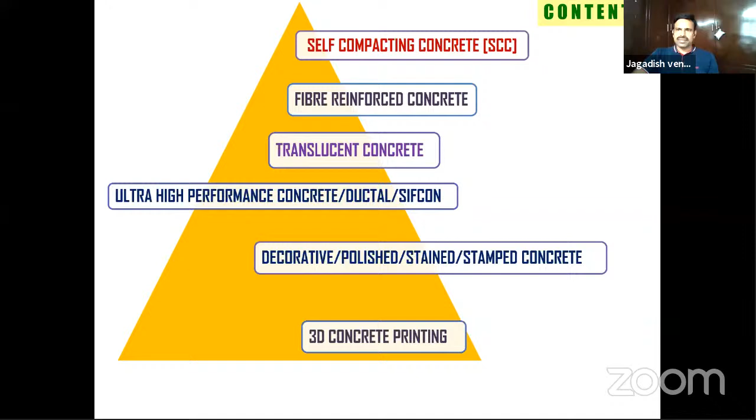To start with, self-compacting concrete. Before that, I would like to show you a video which I took a year back. Most of the time when we go through the concreting happening around us, it is manually produced, site-mixed concrete. I'll show you this video. Please see what is happening.

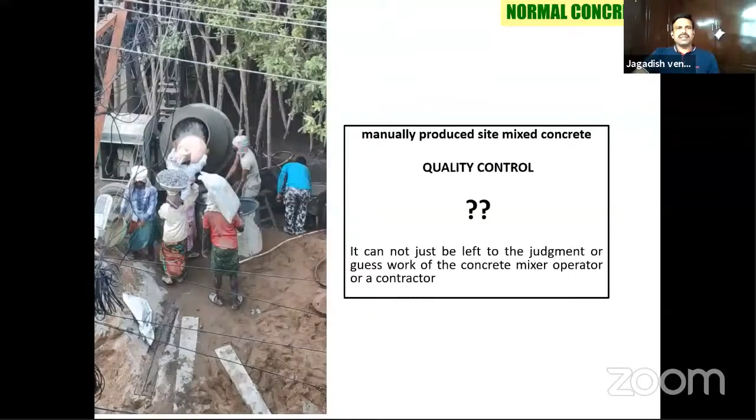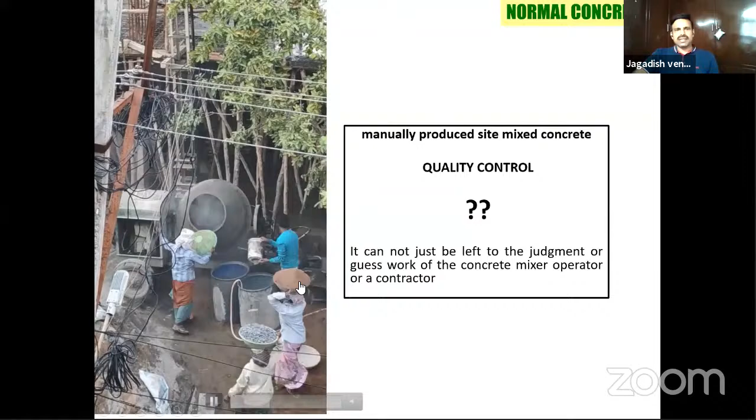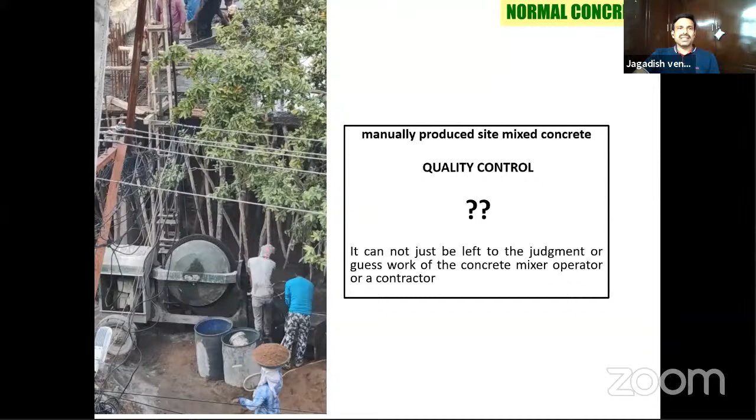The mixer operator is putting in however much water he would like, and people start putting in various quantities like fine aggregate, coarse aggregate, and he has put the cement. If you observe the video carefully, she's putting the coarse aggregate and fine aggregate, while that guy is working at the side doing something else. Just before pouring the concrete, the lady comes, and you see the mixer is moving while he does his work. Now see what happens: the lady has put in the coarse aggregate, and without proper mixing, that fellow is dumping the concrete into the concrete bucket, which then goes up and they place the concrete. So can you imagine the quality of this concrete?

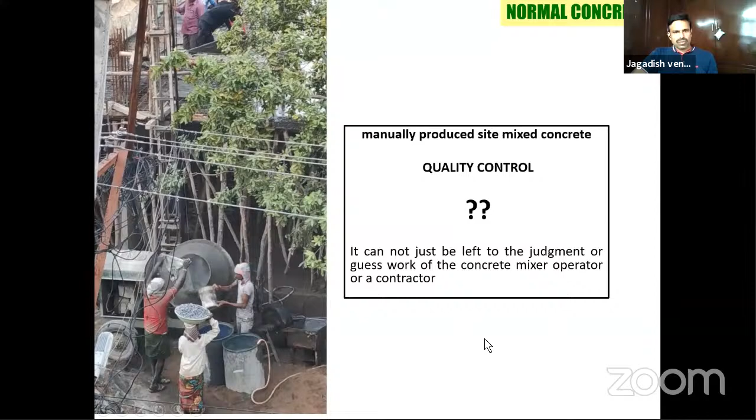You cannot leave it to the judgment or guesswork of the concrete mixer operator or a contractor. This is how many a times at many a places the manually produced site mixed concrete is happening at many sites. So how are you giving quality to this site mixed concrete? This is complicated because a lot of variables are involved in making the concrete, and many properties get affected, both fresh and hardened. You can see the pictures at various places.

But slowly, over a period of time, based on the awareness levels of the customers, people moved either to site batching plants or ready mix plants. So when you have to make the concrete, somebody has to make the concrete.

This is a famous table in IS 456. We design the concrete mix based on the exposure condition, which is very important. There are 5 exposure conditions defined: mild, moderate, severe, very severe, and extreme. The minimum grade of concrete for RCC is M20, and M40 is for extreme. The maximum water cement ratio allowed is 0.55, and the minimum cement content per cubic meter of concrete is around 300 kgs.

So if you have to design the concrete mix, you have to design based on the exposure conditions. Suppose you are in a mild environment, designing two elements like columns and foundations. If the column concrete is in a mild environment, you design for M20 grade of concrete. But the foundation, which is buried under the soil, comes into the moderate condition. So the minimum grade of concrete you have to design is M25, because it comes under moderate condition. So in the same environment, the elements also matter, because the concrete element buried under soil comes under a different exposure condition. You have to go for a minimum grade of concrete that is different.

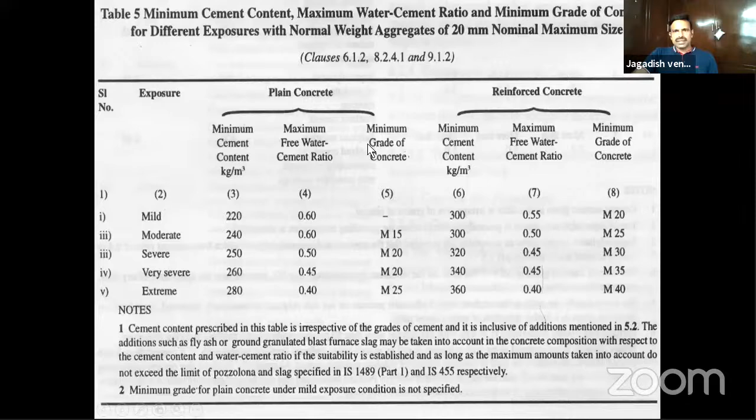With that, let me get into the summary of normal concrete. Typically in cement, we use a quantity between 300 to 400 kgs per cubic meter of concrete. The maximum cement content allowed is 450 kg per cubic meter as per IS 456. Beyond 450 kgs, it leads to heat of hydration, cracking, and other factors get affected.

And the maximum water cement ratio is 0.55; grade of concrete is between M20 to M40, and IS permits you to use mineral admixtures and chemical admixtures. The most commonly used mineral admixtures in India are fly ash, GGBS, and silica fume, and in smaller quantity, rice husk ash, metakaolin, but most sites use fly ash and GGBS in large quantities. For chemical admixtures, they use normal plasticizers to super plasticizers, retarders, accelerators, and so on.

But suppose you wanted to make the concrete flowable, can you make it flowable by merely adding more water? No, because in the fresh state it leads to segregation and bleeding. And in the hardened state, if it segregates and the water bleeds, a lot of air pockets get created in the concrete, and it leads to durability problems.

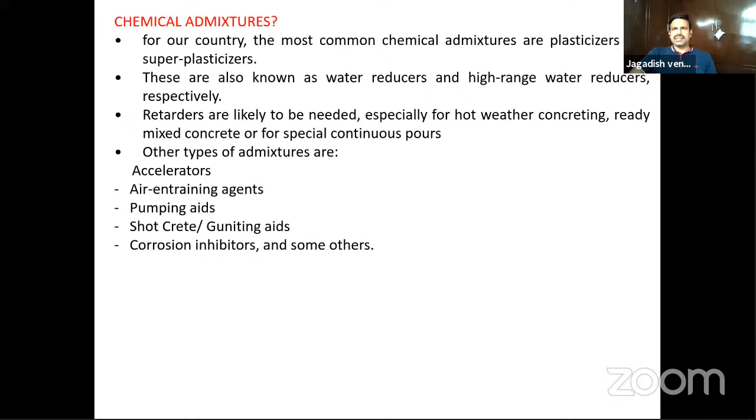So how do you address this issue? How do you increase the flowability? There are chemical admixtures we take advantage of in our country. The most common chemical admixtures we use are plasticizers and super plasticizers. Plasticizers are water reducers, while super plasticizers, as the name suggests, are high range water reducers. We also use retarders and other admixtures such as air entraining agents, pumping aids, shotcrete aids, and other admixtures.

The basic reaction of the chemical admixture, that is the plasticizer: when water is added, the cement naturally flocculates. So the mixed water gets trapped inside these flocks. To release the trapped water within these flocks, we add plasticizer or chemical admixture such that the trapped water gets released and the workability is increased without adding more water.

Suppose if you look into the example here, when you add this chemical admixture, the cement gets deflocculated and the entrapped water is released, and the cement particles move freely. More water is available for the fresh property, the workability increases, and even hydration improves. There are different mechanisms we talk about depending upon the chemical admixture.

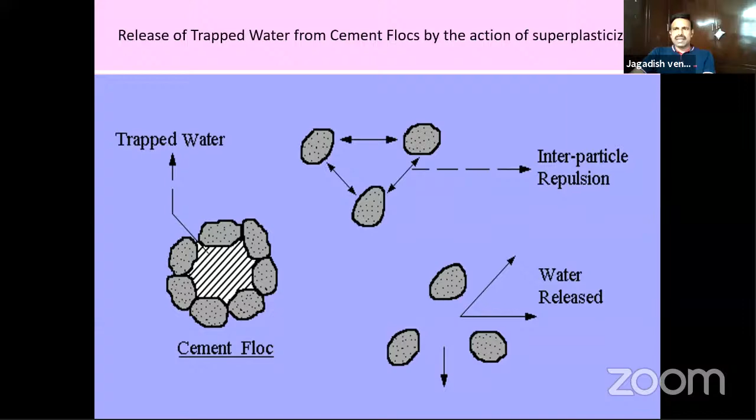By adding the chemical admixture or plasticizer, you can do two things. One is you can increase the slump without changing the water cement ratio. In the first case, you have 0.55 as the water cement ratio, 75 mm slump, and 51 MPa strength. Without changing the water cement ratio, by adding the chemical admixture, the slump increased from 75 to 180 mm.

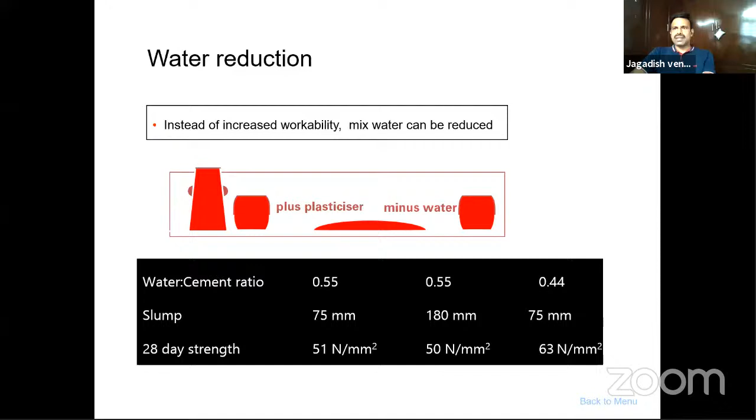In the second case, we have maintained the same slump. By adding chemical admixture, you have reduced the water cement ratio such that for the reduced water cement ratio, you got more strength, that is 63 MPa from 51 MPa. So by changing or maintaining the water cement ratio, either you can get the slump or you can get the strength.

When you're placing concrete in reinforcement, usually we call it the free fall height of concrete. As per IS, it should be 1.5 meters. Suppose if you are placing normal concrete, what happens? The mortar gets stuck to the reinforcement, and the other particles like sand and particularly the coarse aggregate particles get separated out. Only the mortar gets stuck to the steel, particularly in congested reinforcement. This is the common segregation we observe in many of the sites.

So you need a flowable concrete to place it in congested reinforcement. At the same time, it has to flow. So how do you achieve flowable concrete without segregation or bleeding? By adding more fines.

So you cannot use more cement, you cannot go beyond 450 kg of cement, because you need more powder to flow the mix. So by incorporating fines, you can impart cohesion in the mix and enhance the ball bearing effect, that means the workability of the concrete.

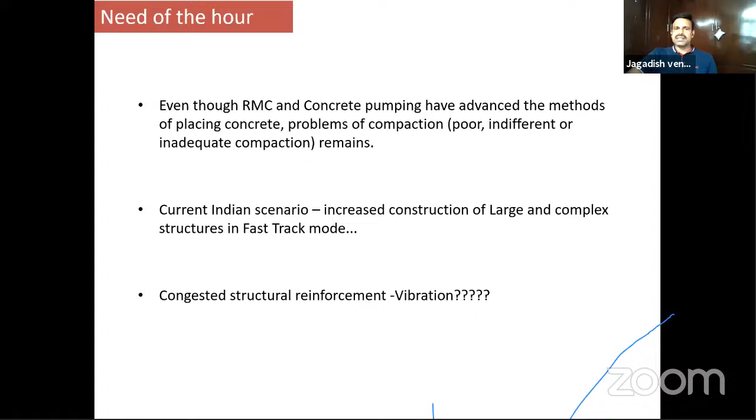RMC and concrete pumping are the advanced methods. But we have large and complex structures coming up in India, and people are using it. There is a lot of congested structural reinforcement. Vibration is a question mark in many of the sites. These are the kinds of congested structural reinforcement you can see, particularly for special structures.

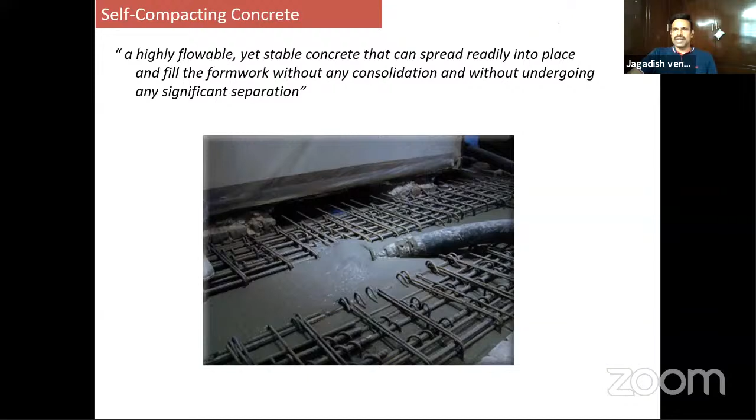So what is the solution? What kind of concrete do you have to put in? You have to place concrete which is highly flowable, and it should be stable all the time, and it should readily place and fill into the entire formwork without any vibration, without any consolidation, and also at the same time it should not get separated. That concrete is nothing but self-compacting concrete.

So where did it originate? There was a skilled workers problem in the Japanese industry in the late 1980s, 1990s and so on. So the motivation behind SCC's origin is the gradual reduction in skilled workers in the Japanese construction industry. The work was started at University of Tokyo by Okamura and others.

There are a lot of advantages, particularly of self-compacting concrete. It will shorten the concreting period. It will minimize the voids. No need to vibrate. It will avoid honeycombing. It will eliminate compaction using the vibrator and so on.

How are the properties different from normal concrete? In normal concrete, the powder content is between 300 to 450 kg per cubic meter. But in case of SCC, the powder content varies between 450 kg per cubic meter to 600 kg per cubic meter. So the minimum itself is 450, up to 600 kg, is the powder content.

In normal concrete, if you take generally a normal mix of M20 grade, the fine aggregate varies between 700 to 800 kg per cubic meter, and coarse aggregate varies between 1200 to 1400 kg per cubic meter. But in case of SCC, there is a lower coarse to fine aggregate ratio. That means both coarse and fine aggregate are in equal quantities, or sometimes the coarse aggregate is in lower quantity compared with the fine aggregate.

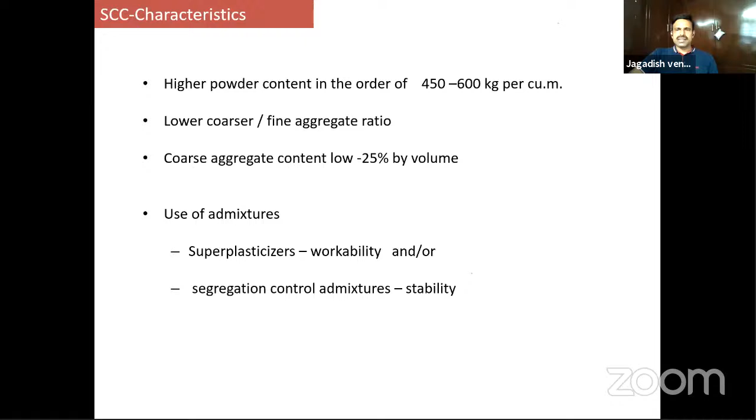So you have to look for other materials. This powder content will keep the coarse aggregates in suspension during the flow, and it will also give a lot of cohesiveness to the concrete. Beyond 450 kg, you have to use powder content in SCC, so you have to look for other powders.

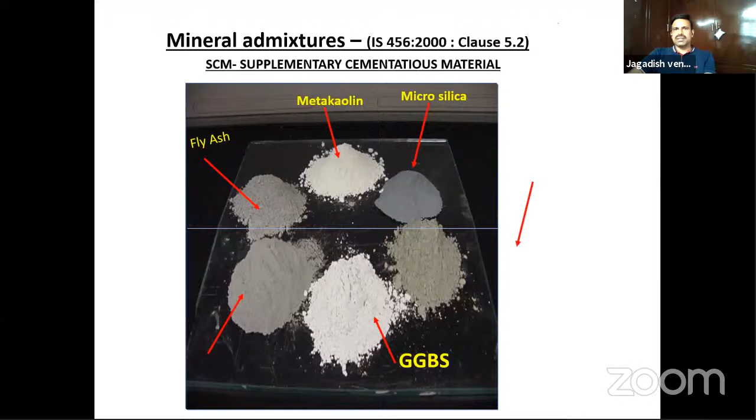As IS 456 clause 5.2 allows you to use a number of mineral admixtures, as I mentioned, starting from fly ash, GGBS, Alccofine, microsilica, metakaolin, rice husk ash, and so on.

What if you add a mineral admixture? You know the basic reaction. When you add water to cement, the basic hydration process happens. The final product, what we call calcium silicate hydrate, that is CSH gel, gives strength to the concrete. And there is a remaining amount of calcium hydroxide, or Portlandite, as we call it.

Suppose you add a supplementary cementitious material, the excess lime present in the concrete will react with the supplementary cementitious material, whether you add fly ash or GGBS. This secondary reaction will happen and form more CSH gels in the concrete. The excess lime present will get reacted again with the supplementary cementitious material, forming more CSH gels, meaning a denser concrete and more strength.

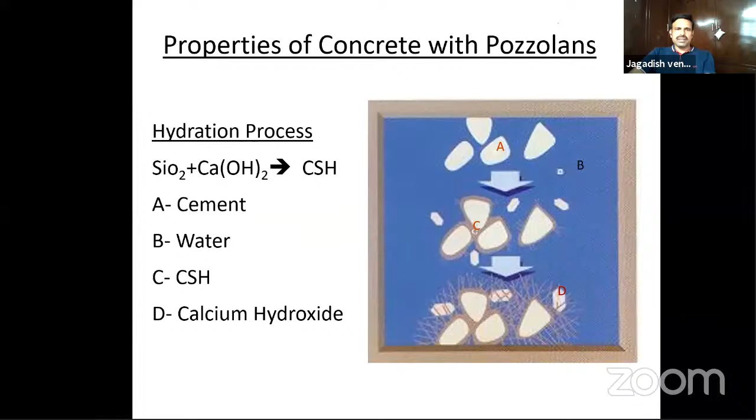This is the typical hydration process. If you add pozzolan, it will increase the impermeability and increase the strength because the pores get filled with additional CSH gels. It will also increase the compression and tensile strength because you have fewer bleed pockets and a denser hydrated cement paste in the concrete with pozzolans.

So we call fly ash the ideal material because India generates more than 100 million tons of fly ash annually. We have many thermal power stations, a number of thermal power stations. Right now I'm in Vijayawada, and we have the Vijayawada thermal power station, the Raichur thermal power station in Karnataka, and Mettur. There are a lot of thermal power stations all over India generating electricity, since the major generation of electricity is from thermal power plants.

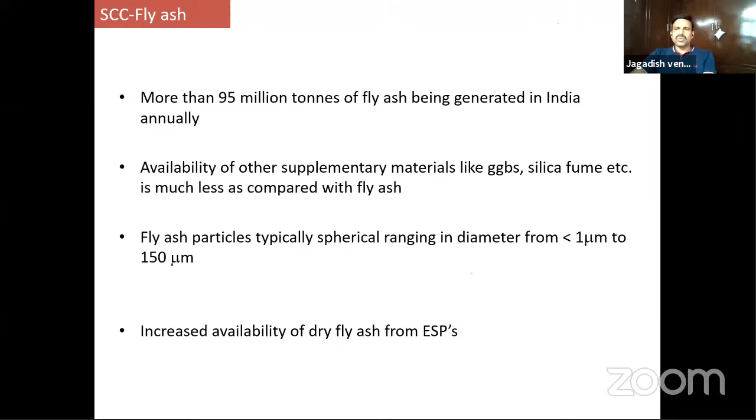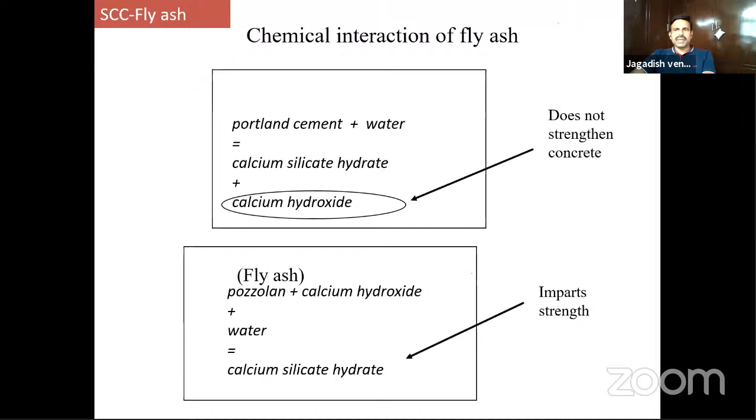This I have already explained. When you add any supplementary cementitious material, a secondary reaction happens, and that's how you get more CSH gels, which imparts strength to the concrete.

When you compare fly ash with other materials like silica fume or metakaolin, it is low cost. You need to spend cost on transportation, and you can use it in larger quantity, like 150 to 350 kg per cubic meter. That's why we call fly ash the ideal powder.

Coming to the properties of self-compacting concrete, for normal concrete you generally only do the slump test and other tests at sites, but for SCC you need to test three properties: filling ability, stability, and passing ability.

Filling ability is the ability of the concrete to flow and fill completely all spaces under its own weight.

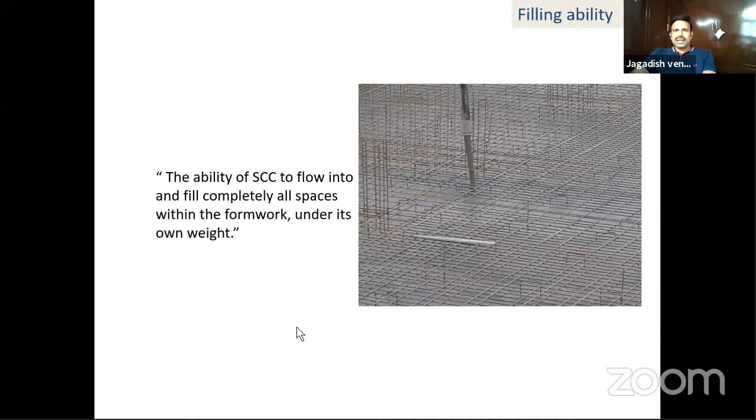Passing ability means the SCC, once poured onto the element within the formwork, has to flow through the reinforcement, through the tight openings of the reinforcement. While flowing, there should not be any segregation or blocking of aggregate. That's how the passing ability test has to pass.

I'll show you what kind of test you do on SCC. Next is segregation resistance. It should remain homogeneous throughout. After mixing, while transporting, and while placing, it should be homogeneous in composition. Very important.

Some of the test methods we use are slump flow, with T50 centimeter slump flow, which measures filling ability. Similarly, J-ring, V-funnel - for V-funnel you do two tests, one at 0 minutes and one at 5 minutes. We also do L-box test, U-box test, fill box test - these measure passing ability. And there's a GTM screen stability test and Orimet test.

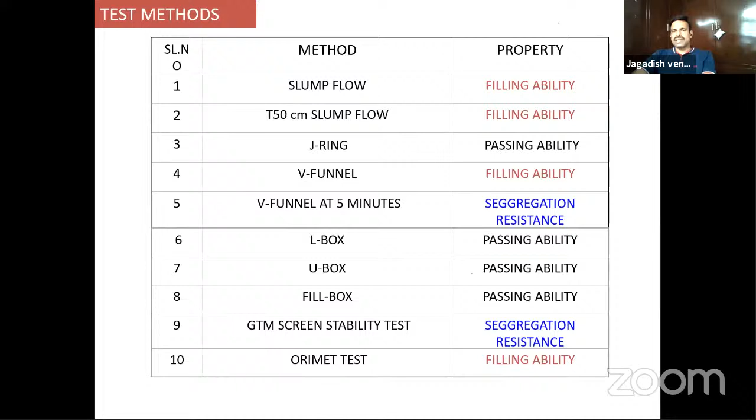Okay, some of the tests I'll show you now. You know the slump cone - this is the slump test I'm going to explain. Normally for normal concrete, you place the concrete in 3 layers, tamping each layer 25 times, then lift the slump cone and measure the vertical slump.

But in case of self-compacting concrete, because it flows, you have to measure the horizontal spread. So once you lift the slump cone, it spreads, and you measure the horizontal free flow. The range of the spread should be between 600 to 800 mm. So once you lift, the concrete flows - this is how you measure it.

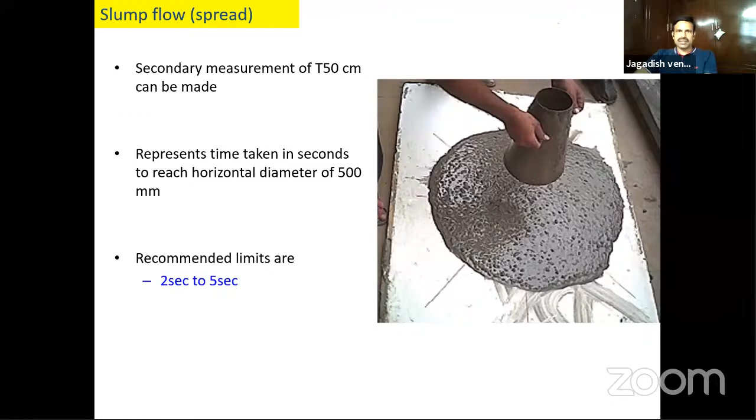There is also one more measurement we do for self-compacting concrete - the time taken for the concrete to reach a diameter of 500 mm. Once you lift the cone, since the bottom is 200 mm, top is 100 mm, and height is 300 mm, the 200 mm base spreads. So the time taken to reach from 200 mm to 500 mm is measured - we call it the T50 centimeter time. It should be between 2 to 5 seconds.

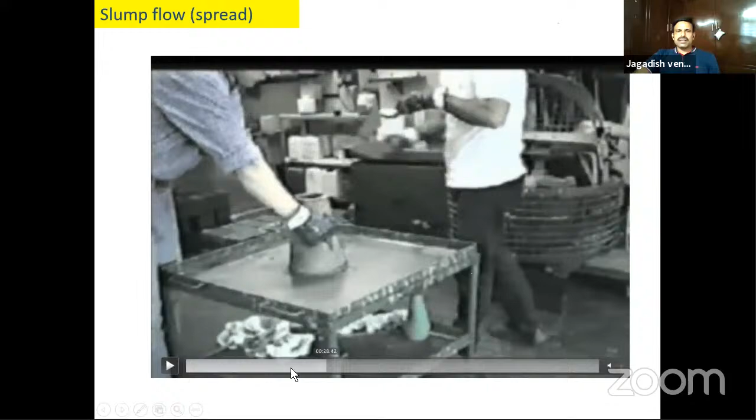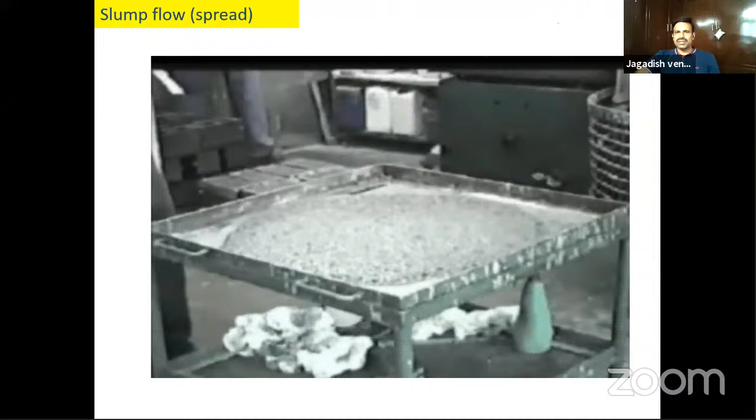So you should not place the concrete and tamp it like normal concrete. You just have to pour the concrete once you mix it, and after pouring, you just lift the slump cone. This is how it spreads. You can measure the T50 centimeter slump flow and the total horizontal spread the concrete has taken. You can also observe whether there is any segregation or bleeding in the mix. This is how you measure the slump flow.

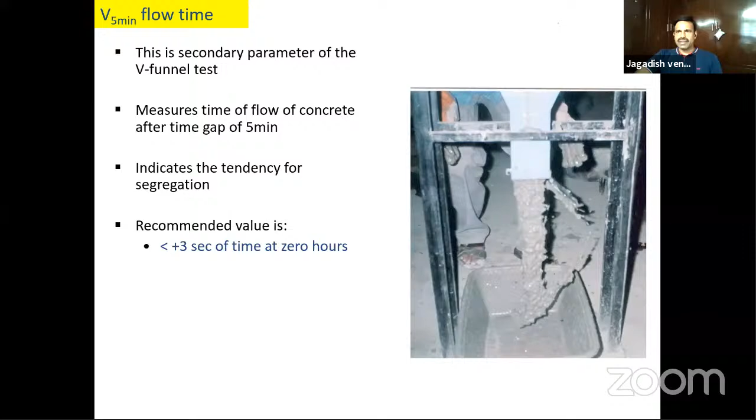There is one more measurement you do using the V-funnel, that is the V5 minutes flow time. You place the concrete in the V-funnel and wait for 5 minutes, then open the bottom door and measure. What happens when you place the concrete and wait for 5 minutes? If the mix is not good, all the coarse aggregate gets collected or settled at the narrow end. So when you open the gate, it will slowly pass through the narrow end because the concrete is not good. The recommended value says it should be less than V-funnel time plus 3 seconds. That means if V-funnel time is 8 seconds, V5 minutes flow time should be less than 11 seconds.

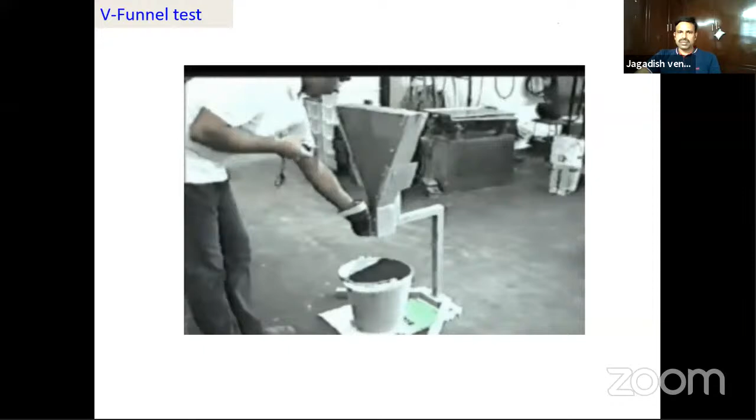This is how you can see in the video - you just pour the SCC onto the V-funnel and get ready with your stopwatch. Then you remove the bottom door, pull it open, and measure the V-funnel time. Similarly, you wait 5 minutes and measure the V5 minutes flow time as well.

Next test is the L-box test. In the L-box test, you have two boxes - one vertical and one horizontal. Here you measure the passing ability of fresh concrete. There is a small gate consisting of reinforcement, and the concrete should pass through this reinforcement.

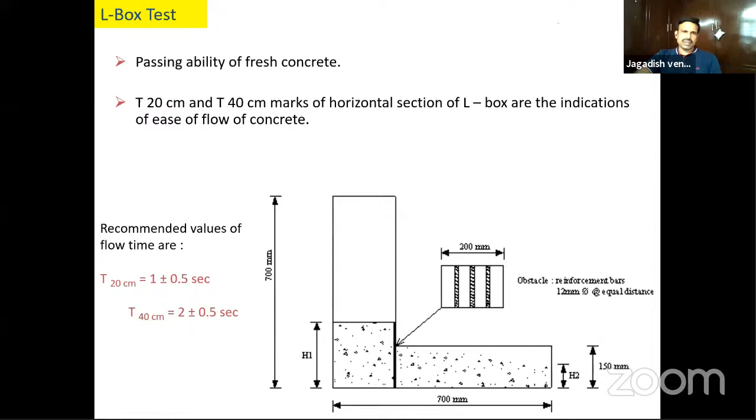So here you measure two things: the time taken to reach 200 mm and 400 mm horizontal box dimension. Our total horizontal box dimension is around 700 mm. You measure from the vertical box the time taken to reach 200 and 400. The recommended value is also there. But what you measure is the blocking ratio of the concrete.

Once you fill the concrete in the vertical box, you lift the gate. The concrete has to flow through this reinforcement, and you measure the heights at both ends. The ratio between both heights gives you the blocking ratio. It should be greater than or equal to 0.8. If it is less than 0.8, there is a problem with the mix.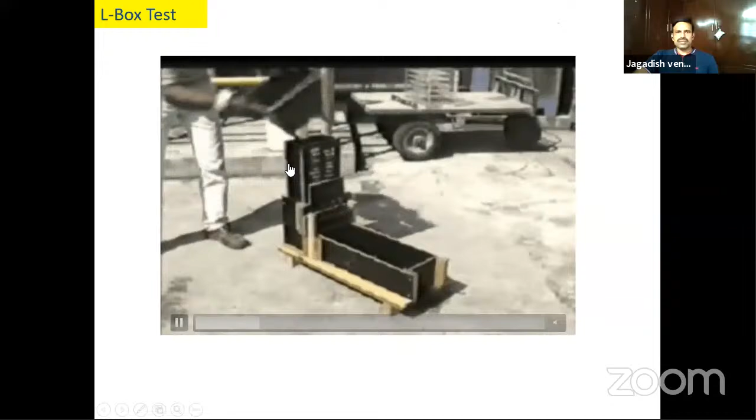So this is how you measure the L-box, the small video. Once it is filled, you lift the gate and there is reinforcement, so it passes through the reinforcement. You measure both ends, what is the height, and the ratio between both heights gives you the blocking ratio, that is H2 by H1.

There is also a measurement called the U-box test. This also measures the passing ability, just like L-box. You fill one limb of the U-box with the SCC, then you open the gate and it will pass through the reinforcement placed at the middle, and the concrete comes into the other limb. You measure the height difference in the two limbs. It should be less than 30 mm.

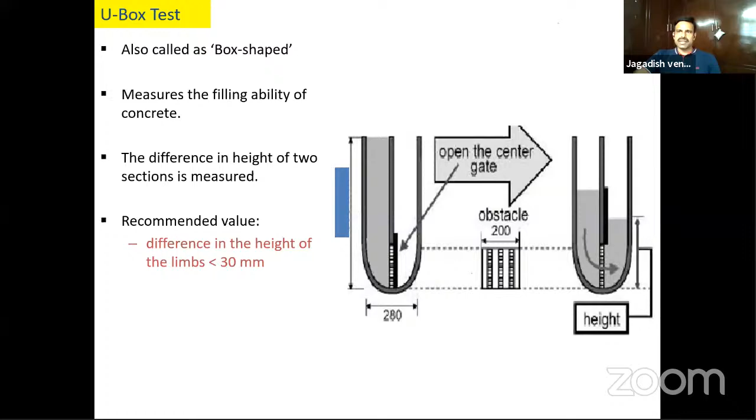This is how you measure. One of the limbs you are filling using SCC. While filling, the gate is closed - there is an obstruction between one limb and the other. Once you pour the SCC, you lift the middle gate, and you can see the concrete flow through the reinforcement and come to the other limb. Then you measure the height difference between these two limbs. You can see here, this is here and here. The height difference should be less than 30 mm.

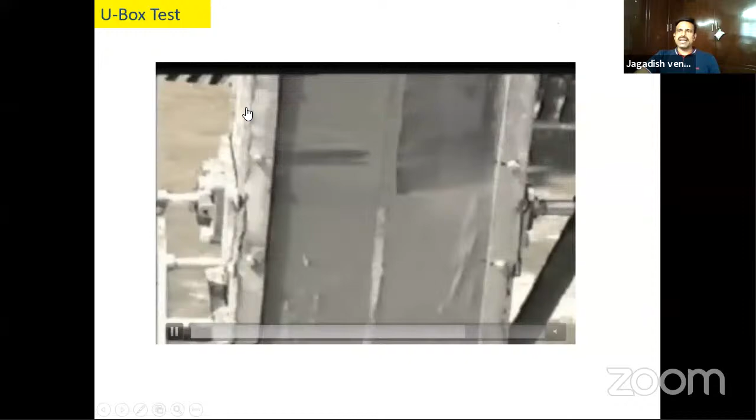That's how you measure. Next, there is also a test called the J-ring test. This is a simple test. You measure the filling ability and a little bit of passing ability. You have a ring with reinforcement. At the middle, you place the slump cone. You pour the concrete, you lift the slump cone, and the concrete also passes through this J-ring. You measure the height difference between inside the J-ring and outside the J-ring, because it passes through the reinforcement.

If the mix has a problem, you will find more height in the middle because it won't pass through. So the height difference between inside and outside of the J-ring should be less than 10 mm. This is how we measure the J-ring test.

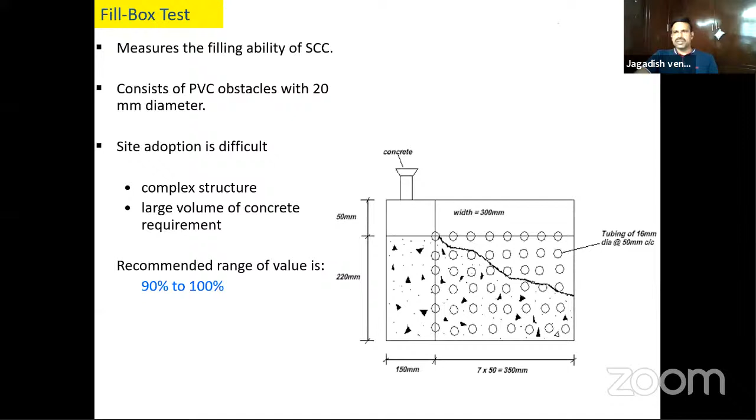Next is the fill box test. Initially, we also made a fill box to test this. I'm talking about 2002. You fill the box using SCC, and it should flow through these reinforcements and fill. That means it should fill between 90 to 100%. How it is, you can see here.

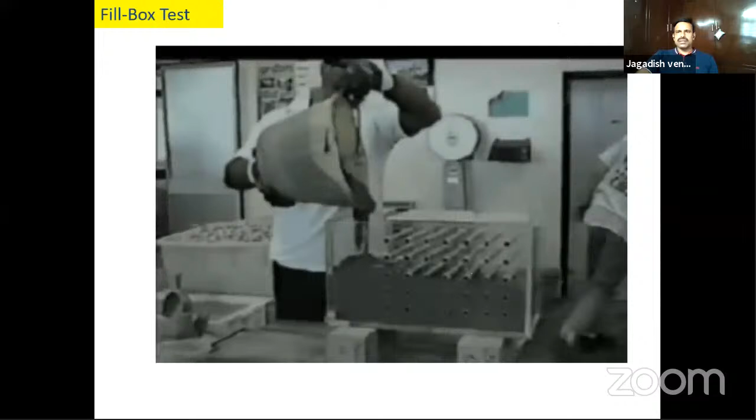One side you are pouring the SCC, and it is passing through the obstacles, the congested obstacles we created. The filling percentage should be 90 to 100%, you can see here. It should be completely filled. If the concrete is good, the value will be between 90 to 100%. So this is the fill box test.

Next is a test called the GTM screen stability test. This is a very simple test. You take 10 liters of concrete in a bucket, wait for 15 minutes, then take the top half quantity, that means the top 5 liters, and sieve it through a 4.75 mm sieve. Then you measure the mortar that passes through the 4.75 mm sieve relative to the original sample taken, that is the 5 liter sample.

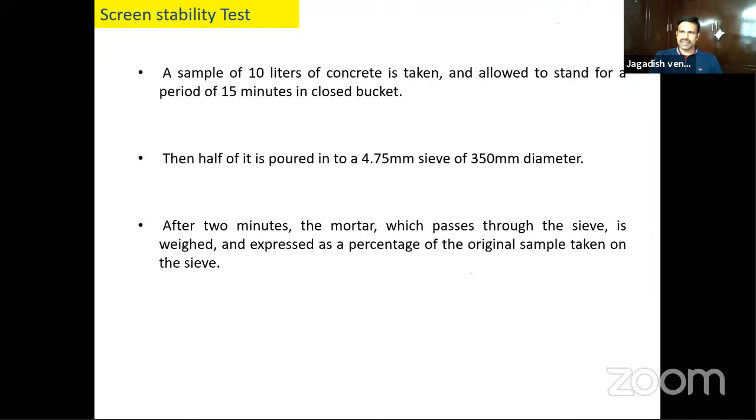You take the percentage - that percentage should be between 5 to 15%, because you should have a sufficient quantity of coarse aggregate particles in the top layer of the 5 liters. If there is a problem in the mix, the aggregate particles will get settled down at the bottom of the bucket. So the segregation resistance, as we call it, should be between 5 to 15%.

So when you sum up all the tests and values, the slump flow should be between 600 to 800. The values change from code to code and country to country, but these are the typical values initially proposed.

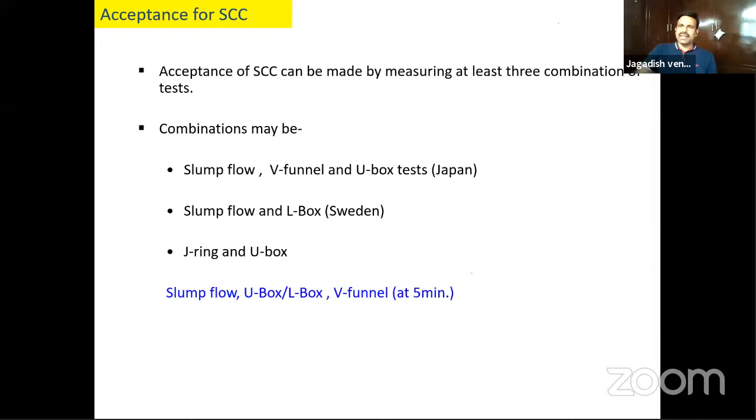You might get confused about what combination of tests to use for acceptance. In Japan, they use slump flow, V-funnel, and U-box test for acceptance. In Sweden, they use slump flow and L-box, because L-box gives passing ability and slump flow measures filling ability. J-ring and U-box are followed by some other countries. We actually suggest slump flow with either U-box or L-box, and you can measure the V-funnel at 5 minutes, which gives a good indication of segregation resistance.

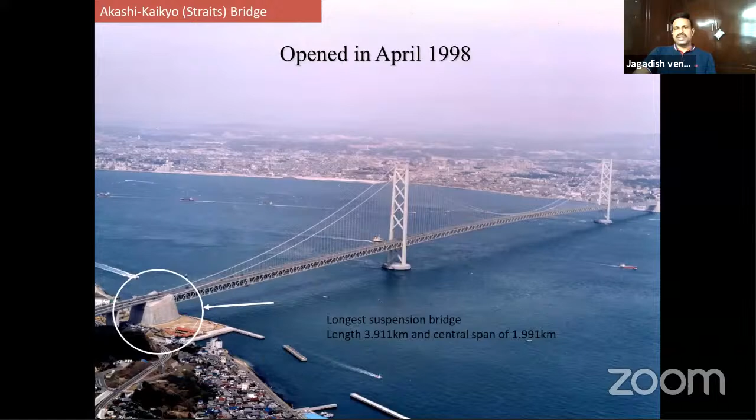You can see the inside view of this gas station, where the complete structure is made using self-compacting concrete. This is the Akashi Kaikyo Bridge. I happened to go there and took a picture when I visited Japan in 2009. This bridge was opened in 1998, and it's the longest suspension bridge, connecting two islands of Japan. Its length is around 3.9 kilometers, and 240,000 cubic meters of SCC was placed in this particular pier.

And then, a lot of applications followed — people are now regularly using self-compacting concrete. DMRC Delhi used self-compacting concrete for their tunnel lining and so on, and there are applications in Sweden for tunnel lining, and for precast concrete elements in Netherlands.

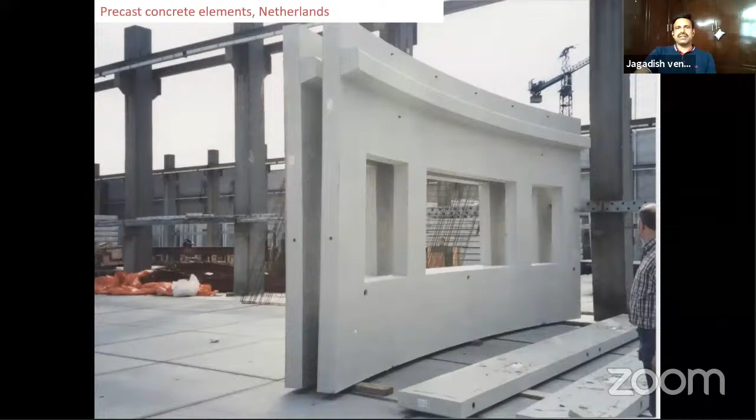Precast elements are a very good example of using SCC. These are the precast elements — you can just lift them. For precast applications, SCC is quite useful.

When we worked on this in 2002, here are some experiments I'd like to mention. We used OPC 53 grade — at that time I was in Bangalore working for Torsteel Research Foundation, India, where we brought Raichur Thermal Power Station fly ash with Blaine's fineness of 4,770 square centimeters per gram. We used 12mm downgraded aggregate and river sand, which was naturally available at that time — now most sites in Bangalore use manufactured sand, crusher fines. We also used polycarboxylate-based plasticizer and VMA.

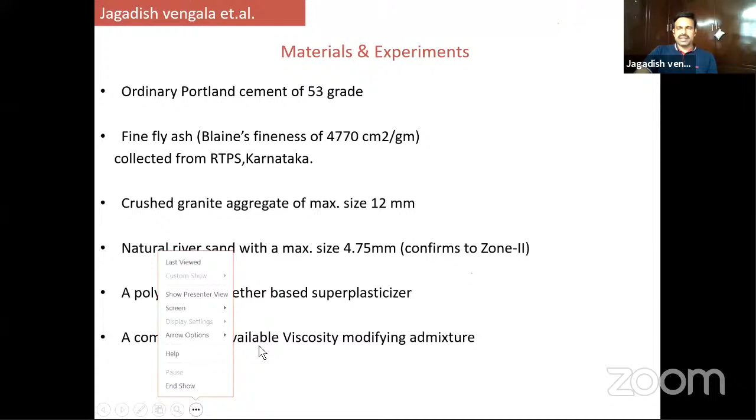Very interesting results, as Venkatesh Babu was mentioning, which I presented in 2003 at an international conference conducted by Kumaraguru in association with Ravindra Gettu. The interesting work here is we used fly ash and tested, out of curiosity, the 180-day and 270-day performance of SCC. At 28 days we got around 50 MPa, but at 270 days we almost got 90 MPa strength.

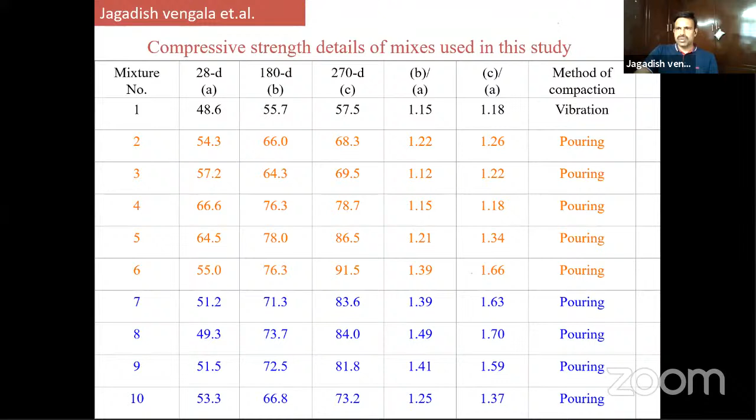Based on experiments conducted by various researchers, it's very evident that the hardening properties of SCC are equal to or higher in compressive strength many times, have the same or greater resistance to freeze-thaw, and improve durability because of fewer voids in the concrete.

SCC mixes particularly have high paste content. In normal concretes, the powder content is typically around 26-28%, but in SCC mixes the powder content goes up to 38-45% of the volume fraction of paste. As mentioned, the coarse and fine aggregates have equal volumes. But whatever mix you make, it needs guidelines, laboratory tests, and field trials — very, very important.

The next concrete I'm going to discuss is fiber reinforced concrete. Why do we use fibers? You need to bridge the cracks and increase the ductility in concrete elements. There is also a considerable improvement in post-cracking behavior after using fibers, and it reduces permeability. Some fibers even increase abrasion and shatter resistance.

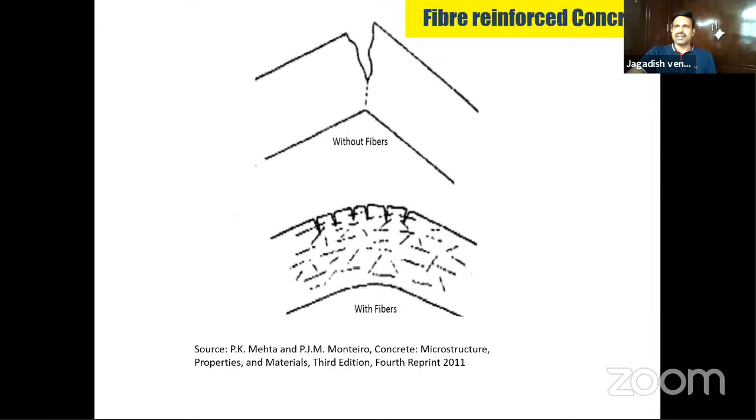A lot of fibers are available - steel, glass fibers, carbon and cellulose fibers, synthetic fibers like polypropylene and nylon fibers. Initially we tried Recron 3s, Reliance fibers, when I was in Torsteel. I'm talking about 2003, and during that time it was the first time we tested fibers for various concrete applications. There are also natural fibers like coir, hay, and even bamboo fibers.

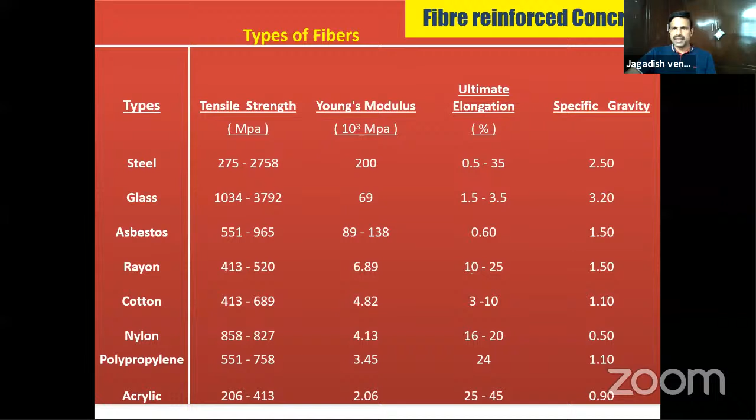Some of the properties of these fibers you can look at. Some have more Young's modulus, some have more ultimate elongation, some have more tensile strength.

But what are the factors that affect the properties of FRC? We should know. One is the volume of fibers - how much volume you increase, whether it's low volume, medium, moderate volume, or high volume - this affects the properties. Also the aspect ratio and orientation matter.

Coming to the volume of fibers, if you're using less than 1% of material fibers, we call it a low volume fraction. Usually we use it for horizontal applications, particularly slabs and pavement exposed surfaces.

1 to 2% we use for moderate volume applications, particularly shotcrete applications, because when you do the shotcreting, it has to go and stick to the reinforcement, and the mortar or material should stay together. So these fibers need more volume, and it also improves the capacity against delamination and spalling because the fibers hold the materials together.

High volume applications, particularly for high performance fiber reinforced composites, use high volume fractions, like more than 2% by volume.

Aspect ratio is also a very important parameter - that is the length to diameter ratio of a single fiber. When you look at aspect ratio versus relative strength, from 0 to 75 aspect ratio, there is an increase in strength and toughness, but beyond 75 there is a decrease again. So you have to use fibers with an aspect ratio, L by D ratio, between 0 to 75.

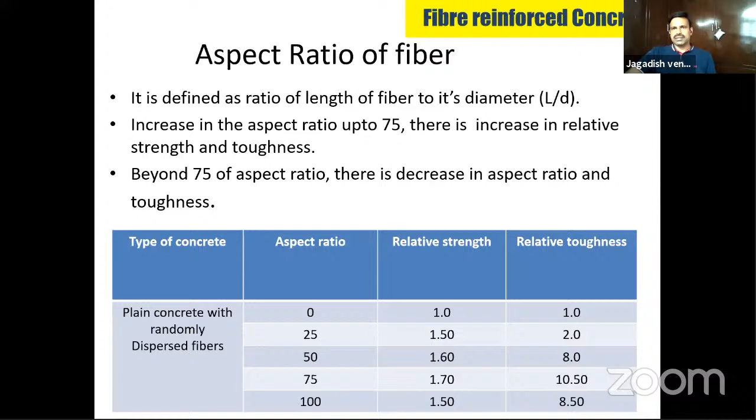Orientation - how do you orient the fibers? Is it in the direction of load, perpendicular to load, or randomly distributed? In general concrete applications, we usually distribute randomly. But fibers aligned parallel to applied load offer more tensile strength. So when you place fibers for special applications, you get more strength and toughness compared to randomly distributed or perpendicular orientation.

Low modulus fibers impart more energy absorption compared with high modulus fibers. Low modulus fibers are like nylon and polypropylene. High modulus fibers are steel, glass, or carbon fibers. This is very, very important - many times people miss this.

The mixing sequence, when making fiber reinforced concrete, you have to be very careful and alert. Many people don't follow it - they dump everything, cement, coarse aggregate, fine aggregate, fibers, all at one shot including water, and then mix it. But in the case of fiber reinforced concrete, this is very important to avoid.

First, place half the coarse aggregates and put 20% of fibers and mix it. Again, the remaining half of coarse aggregates and another 20% of fibers, mix it. Then 50% of sand, put 20% fibers, mix it. Again 50% sand and another 20% fibers, mix it. Then lastly put the cement and rotate, add the remaining 20% of fibers, add water last, and mix it and place it. This mixing sequence must be followed because the fibers have to be distributed randomly - if you don't do it, the fibers will lump together and settle somewhere.

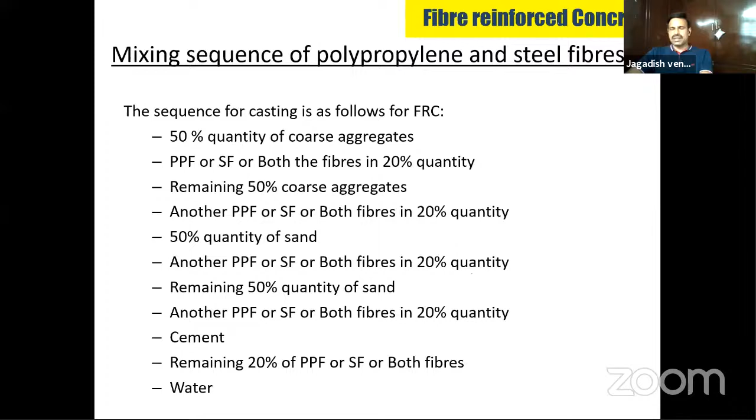Many applications in India and abroad - Heathrow Airport, the road project in Madurai, and many other applications.

So coming to some of the work we did - we did a fiber reinforced SCC with a ternary blend for one of the projects. We did trials using 350 kgs of cement and 135 kgs of GGBS, and because it's a high strength concrete, we also used alcofines and silica fume.

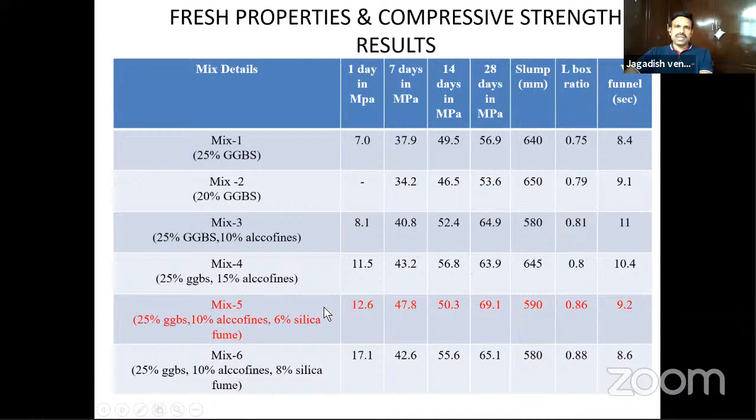Without fibers, we got around 69 MPa. We made an SCC mix and did all the tests - compression, V-funnel, slump flow, box test. You can see the mixes here. The first mix, 28-day strength was 56 MPa with 25% GGBS, then we tried 20%. 25% gave more strength, so we used 25% GGBS and 10% alcofines. We also tried 15% alcofines, but 10% was optimum, so we used 10% alcofines along with 6% and 8% silica fume. Out of these, 6% silica fume gave the optimal mix. So mix 5 was taken as the optimal mix with the various powders in the SCC.

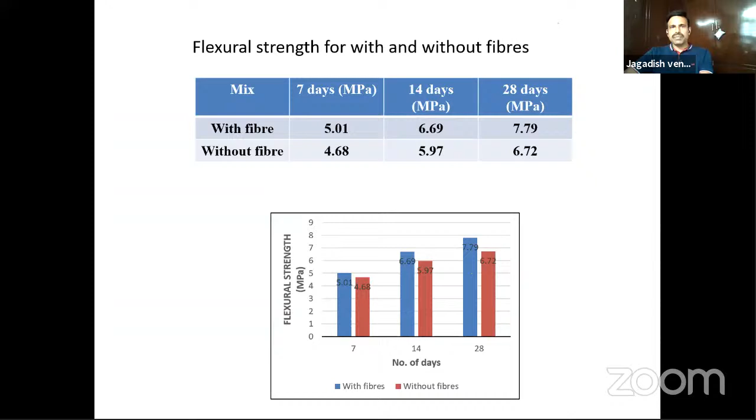Then we started adding fibers at different quantities - this is 0.3% fibers, with and without. The compressive strength is more or less the same, about 1 MPa difference, not great. But the flexural strength with fiber shows almost 1 MPa improvement, which is significant in flexural strength - so there's a lot of improvement in flexural strength when using fibers. Again with and without fibers, looking at split tensile strength, here also you see a great difference, almost 1 MPa.

Next, you can see the difference between with and without fibers in terms of flow. This is very important - when you add fibers, more surface area is involved and the flow automatically reduces, meaning there's a little dip in the flow. You can see this in L-box, V-funnel, and slump tests. In the slump flow itself, the spread drops down to 40 mm because of the fibers.

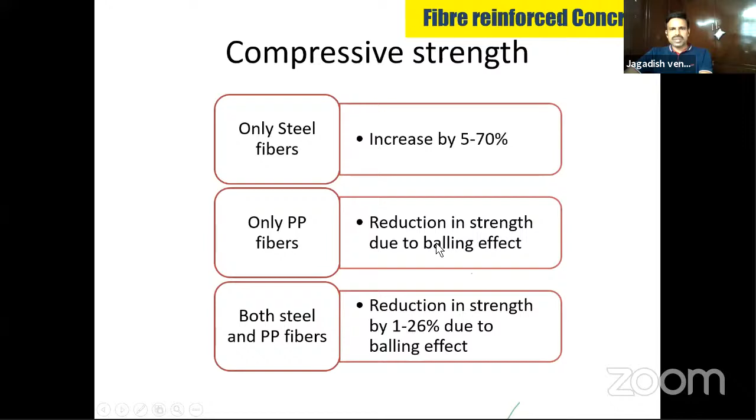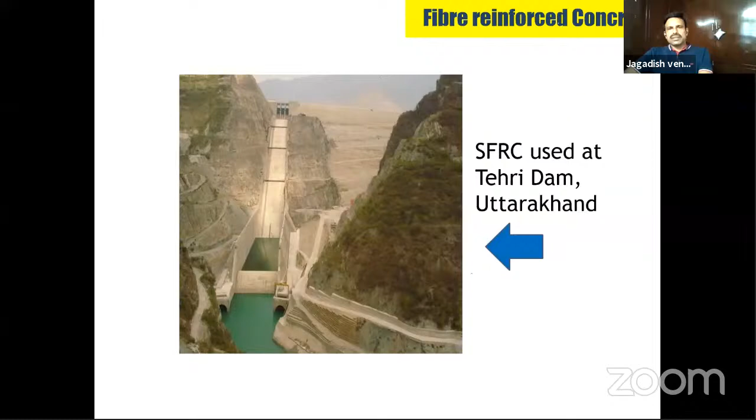Based on review of literature and various works, typically when polypropylene and steel fibers are used, these are the results, particularly on compressive strength. You can see it holds - even the fracture behavior of the concrete changes when you use fibers. Even the tensile strength holds, and the crack behavior changes completely. The impact strength - it holds the concrete into place, so using fibers also contributes to impact strength, and shear strength as well. Some applications include Tehri Dam in Uttarakhand.

There are three types of lightweight concrete - you can produce it using lightweight aggregate, you can aerate the concrete, or you can remove the coarse aggregate, meaning remove the fine aggregate - that means no-fines concrete, only aggregate and paste, so in between you create voids. Lightweight aggregate concrete is usually used in UK, France, and USA. In Scandinavian countries, they use aerated concrete. No-fines concrete is a little less popular compared to the others.

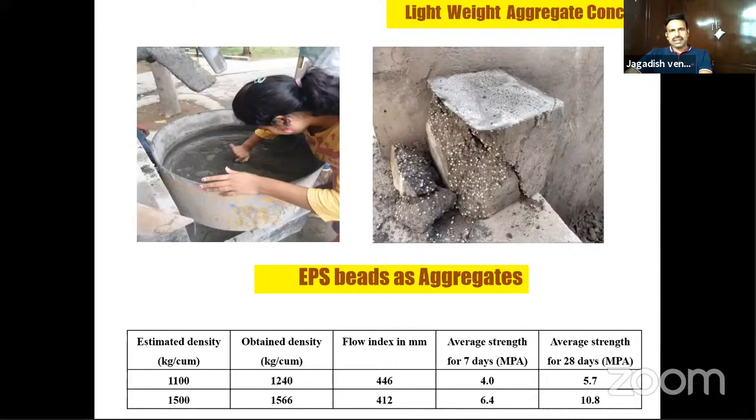This is work we did for a project in Vijayawada. When they wanted a lightweight slab roof for a clubhouse, we used EPS beads as coarse aggregates, and we were able to reduce the density from 2400 kg per cubic meter to 1200-1500 kg per cubic meter, with a compressive strength of 10 MPa since they wanted it a little less - this is only for minor applications. So we used EPS beads as aggregates, reduced the density, and got the required strength too.

There is also structural lightweight concrete, as we call it. Here the condition is a minimum 17 MPa strength you should have, and dry density should not exceed 1850 kg - it should be less than 1850 kg.

And aerated concrete, AAC block is one example for aerated concrete. So you can induce the air in 2 ways. One is by incorporating gas. This gas is produced by incorporating aluminum powder into the concrete mix, wherein it is a gas producing agent.

You take 0.2% by weight of cement. How it reacts: the aluminum powder reacts with the calcium hydroxide and liberates hydrogen bubbles. That's how you can create the voids in the concrete, and that's how the density will get reduced.

You can see the AAC, autoclaved aerated concrete block, is such an example. You can see the surface texture of the AAC block. One of the projects I did was with Ultratech cement, and we did some experiments wherein the block density is around 650 kg per cubic meter.

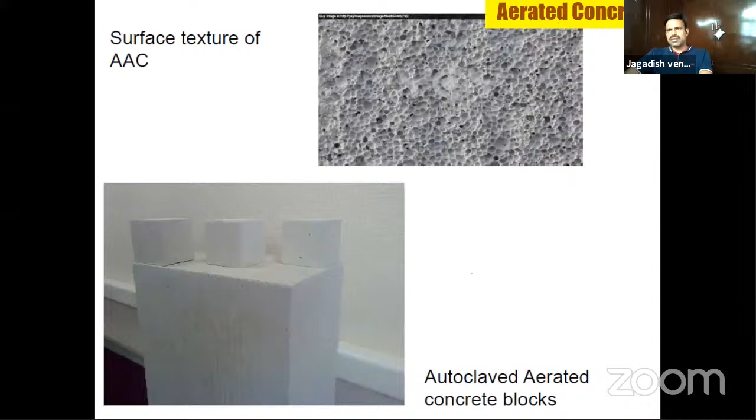And when compared to the solid concrete blocks, the temperature can be reduced. There is about 2 to 3 degrees centigrade less temperature when compared with the solid concrete blocks.

Next is pervious concrete, which you can call no-fines concrete. You will allow the water through; in other cases, we don't allow the water. Here you allow the concrete to allow the water. So you design the concrete based on the water drainage rate per minute in a 1 square meter area, how much amount of water you will allow.

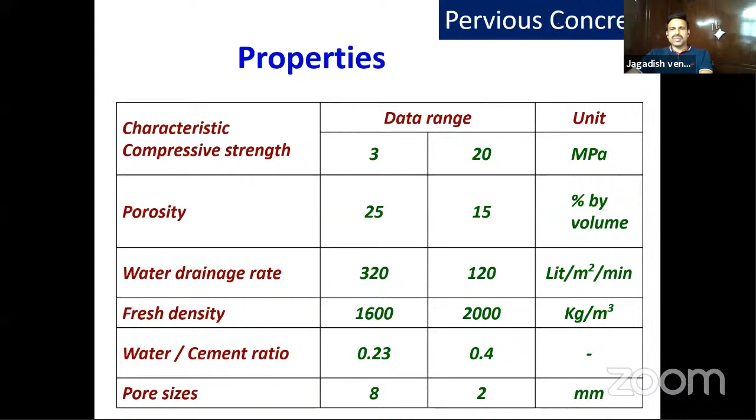So the range is between 320 to 120 liters, and the density also ranges between 1600 to 2000 kg. There are a lot of applications, particularly residential roads, driveways, swimming pool decks, and so on, wherein once the rain comes it won't stagnate, it passes through the pervious concrete and joins with the nearby drainage system.

Next, there are a lot of concretes used for specialized applications, smart concrete, particularly conductive concrete. This is basically a heating concrete. Here, for this concrete, you use 2% steel fibers and 20% steel shavings, almost 22% of steel used inside the concrete.

So what you do is plug that concrete to a power source, and it will get heated up through the steel shavings inside the concrete. These are particularly useful for cold countries where you want to de-ice the concrete surface. You heat the steel shavings, you heat the concrete such that all the icing gets de-watered - that's the de-icing purpose. Per square meter, it consumes about 10 to 40 kilowatt hours of power.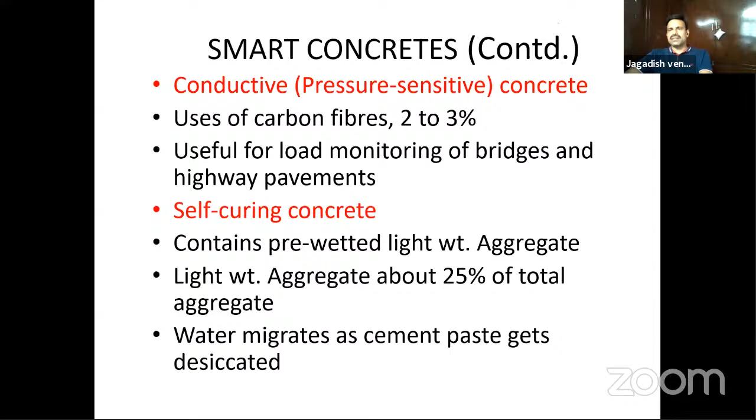There is a pressure sensitive concrete, where you use carbon fibers, 2 to 3%, so you can actually monitor the load of bridges and highway pavements. And there is a self-curing concrete, wherein you can use a lightweight aggregate which holds the water inside, and slowly it migrates - this water migrates to the cement paste and the hydration keeps happening.

And ultra high performance concrete and reactive powder concrete are special applications with a lot of combination of materials, composite materials you use: silica fume, quartz flour, fine silica sand, water reducer, various fibers.

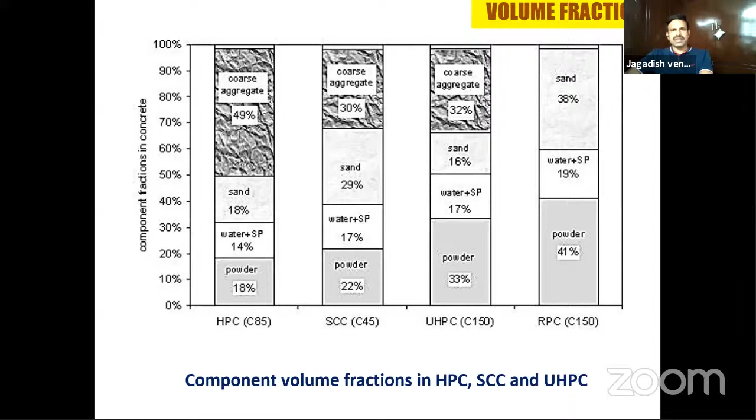This is the difference between the high performance SCC and ultra high performance concrete. So you can see here in case of reactive powder concrete, there is no coarse aggregate present. In ultra high performance concrete, you can see around only 32%. Even SCC also you can see.

This ultra high performance concrete or reactive powder concrete is used for specialized applications, particularly architectural curves or whatever shapes, if you want, you can use this kind of concrete. And it can produce up to 200 MPa of compressive strength and up to 20 MPa of flexural strength.

And there is a high density concrete. This concrete we use for radiation shielding. Some of the aggregates we use for this high density concrete are barite or magnetite. The density goes up to 3,360. Some concretes using iron can go up to 5,200 kg.

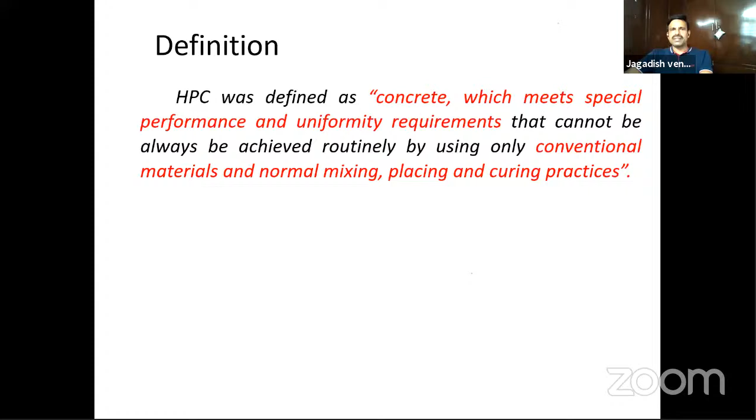High performance concrete is a combination of different concretes. Particularly, it has to satisfy both performance and uniformity requirements.

And for high performance concrete, the permeability factor - you have a lot of proportioning methods, and you have to take care of the moisture, vaporized gases, dissolved ions. So what I mean is the permeability factor and also durability factors you have to consider in case of high performance concrete.

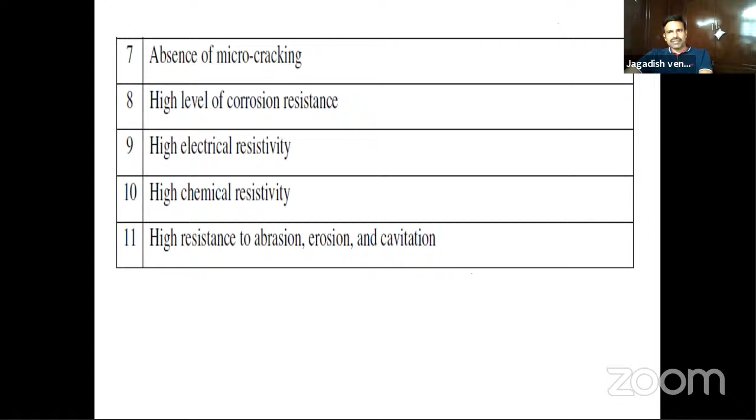Some of the salient features: compressive strength is more than 70 MPa, very high early strength, and high degree of impermeability, and also high resistance to sulfate attack. And it should have a smooth fractured surface in case of high performance concrete, and also high levels of corrosion resistance - so both performance and strength, durability requirements.

High density concrete - I've already mentioned the applications, particularly radiation shields and so on. You know that there are typical radiations, electromagnetic waves, and nuclear particles. So you should have an appropriate thickness of concrete sheet to arrest these rays.

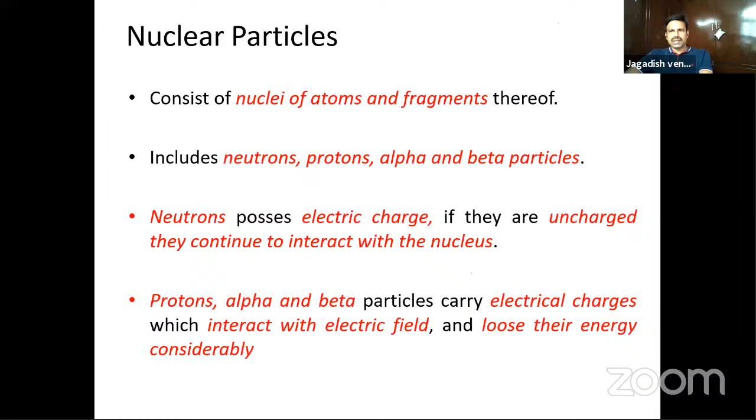And also high temperature is generated. So aggregates whose specific gravity is more than 3.5 are used for particularly high density concrete applications. Some of the aggregates are like barite, magnetite, ilmenite, and so on. It should be highly dense, and appropriate admixture and vibration for good compaction you have to go with.

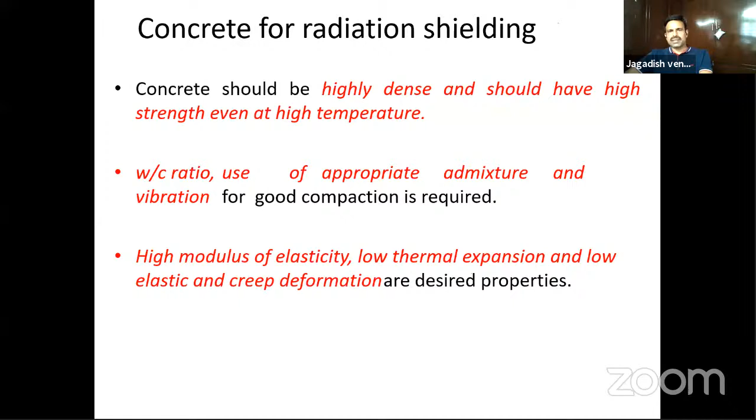Recently, you may have heard in the news about 3D concrete printing. IIT Madras has done a lot of work particularly on 3D concrete printing. It's a computer-controlled sequential laying of concrete material.

There are different methods of 3D printing. One is robotic arm-based, and frame-based systems when talking about extrusion-based 3D printing. And there is also binder jetting. You can see the video.

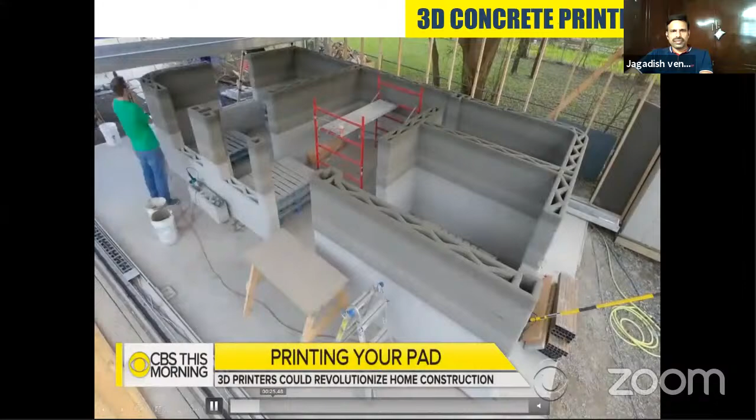So this is a picture of the printing of concrete, printing a home by 3D concrete. I'm just skipping ahead. This is the house. Layers of concrete are placed.

So we have to check the viscosity. Once the concrete comes out of the jet, it has to be placed and set immediately. So you have to work a lot on this particular concrete.

There are two types basically. One is mobile 3D concrete printing, which can be used in multiple locations. You can take it - the robotic arm sits on a rubber track, and then it moves regardless of terrain. So the mortar comes out from the hose and prints at the programmed location.

And there is a fixed 3D concrete printer, which is useful for precast applications, particularly in universities and research institutes, for prototyping and precast production. Robotic arm sits on a metal frame, and mortar comes out of the same jet.

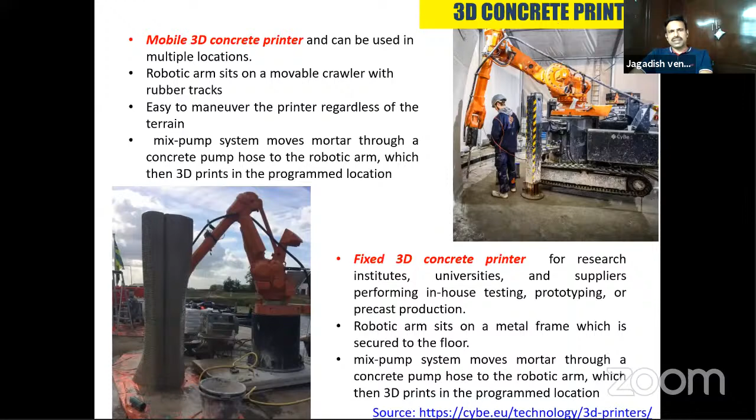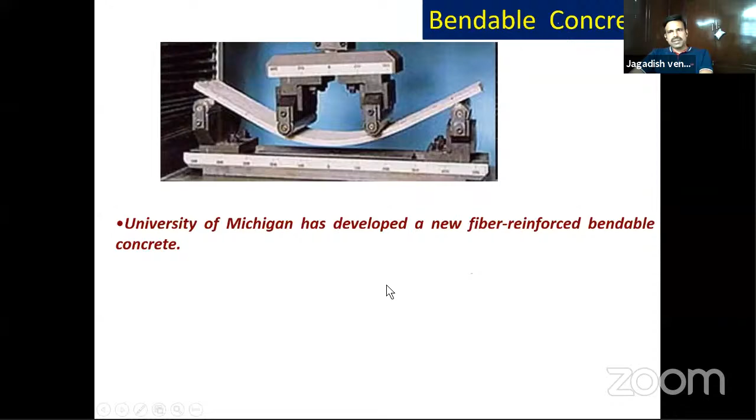Next is bendable concrete. University of Michigan developed a fiber reinforced bendable concrete, using engineered cementitious composites plus aggregates and fibers. It is 40% lighter and 500 times more resistant to cracking.

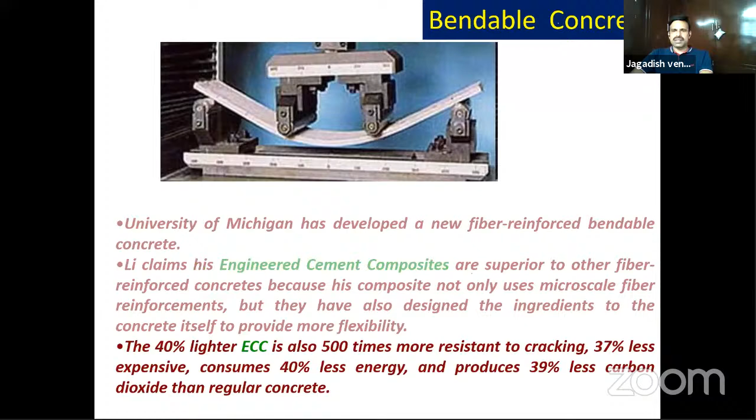You can see a small video of this, showing the conventional concrete and bendable concrete, the difference for the same load.

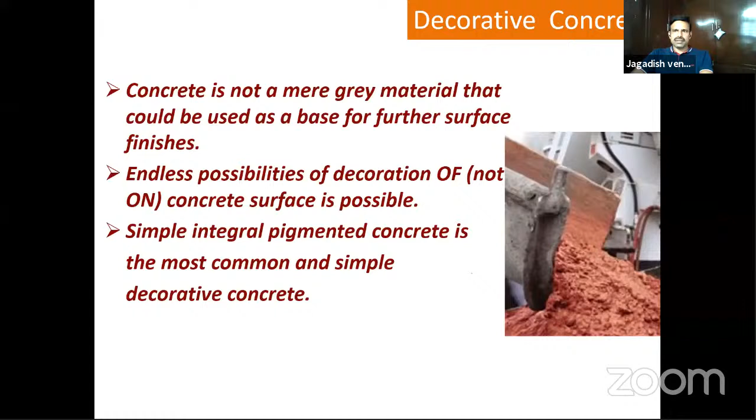You can polish the concrete after placing so that you get a nice finish. Stain concrete - you can do acid etch staining. Ultratech is doing this work. You can make concrete sinks and vessels using the concrete.